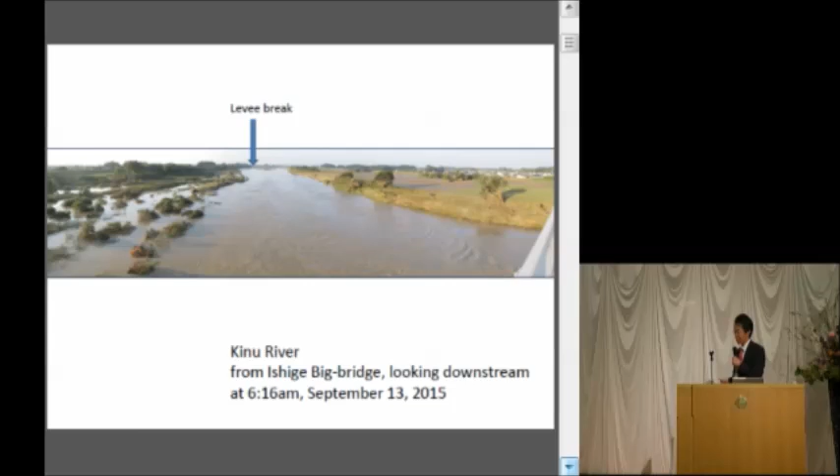This is from the Ishige Big Bridge looking downstream, taken 3 days after the levee break happened. The levee break point is over there. Exaggerated vertically, I superimposed the image of a cross-section.

Today's key phrase is channel capacity. If the channel capacity had been increased more, would that flooding have been protected or not? That's the question, and probably this kind of question will be, or already is being, raised.

Does a levee break by overtopping and the consequent flood disaster show the limitations of measures to reduce flooding probability by increasing flood flow capacity? Or does it still show the necessity to increase flood flow capacity to raise the safety level against flooding? Of course, it is very important to consider the longitudinal balance very cautiously, but there are two directions.

Before answering this question, I would like to first emphasize this characteristic, which is very natural: the flood probability is highly sensitive to changes in channel capacity.

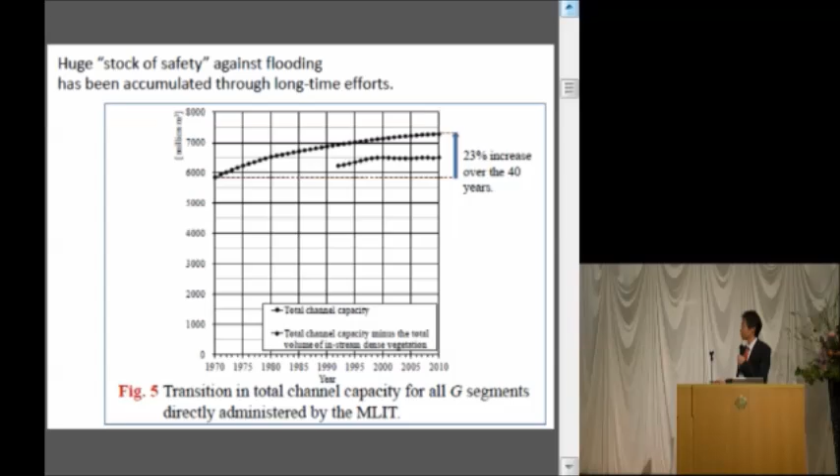Compare these two figures. For example, 23% is here, so this corresponds to double or even triple the return period. That's a great increase in the safety level.

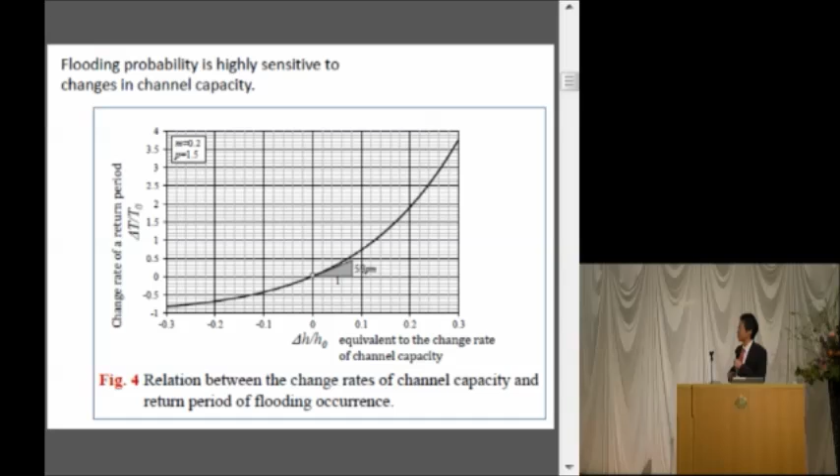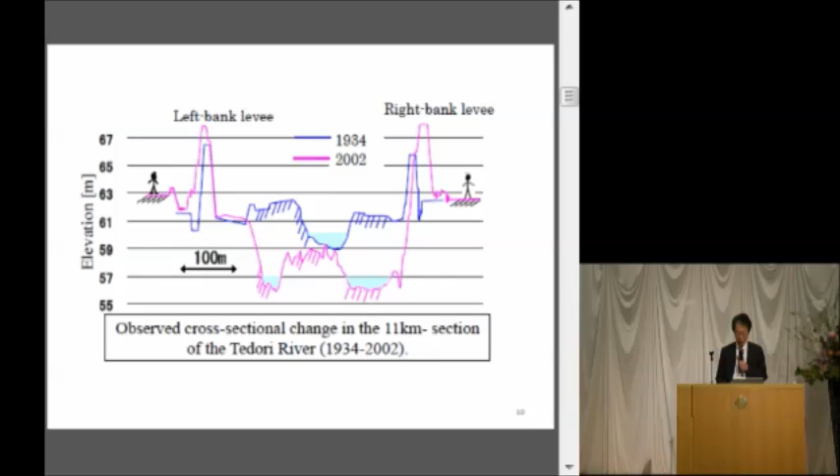So how about the answer to this question? A very natural answer: yes, now we are facing the impact of global climate change, and torrential rain frequency looks like it's increasing and becoming more violent. It is apparent, but at the same time, excavation is very effective in reducing flooding probability.

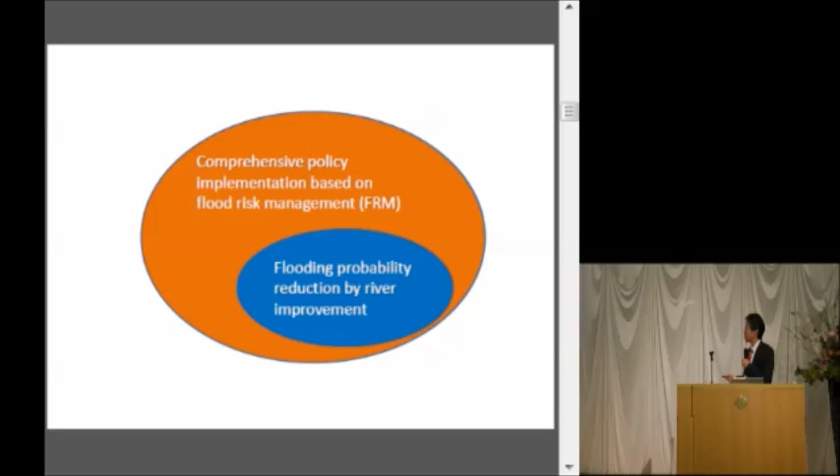So both are important, and today in my talk I would like to emphasize that this one is still important. Of course, this should be aligned among the various approaches belonging to flood risk management, but at the same time this was very important. The question is, how can we, particularly in Japan where we have a huge stock, maintain this huge built stock in terms of flood flow capacity?

How far can we rely on increasing flood flow capacity? Or in other words, how far shall we be able to rely on it? And how can we have a wise command of increasing flood flow capacity? These are the questions I would like to raise through this talk.

Prediction and control of post-improvement channel responses is still a core technology, even at the stage of comprehensive policy formation. This is the background of my talk.

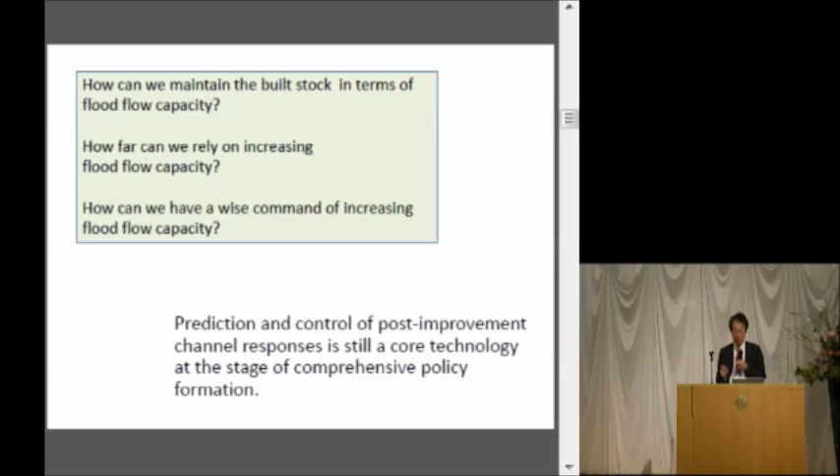Before entering the main subject, I would like to say that this paper focuses only on the local relation between channel capacity and flood conveyance, not extending the discussion boundary toward longitudinal balance in flooding probability in a river system, because that issue is very complicated, so it's beyond today's talk.

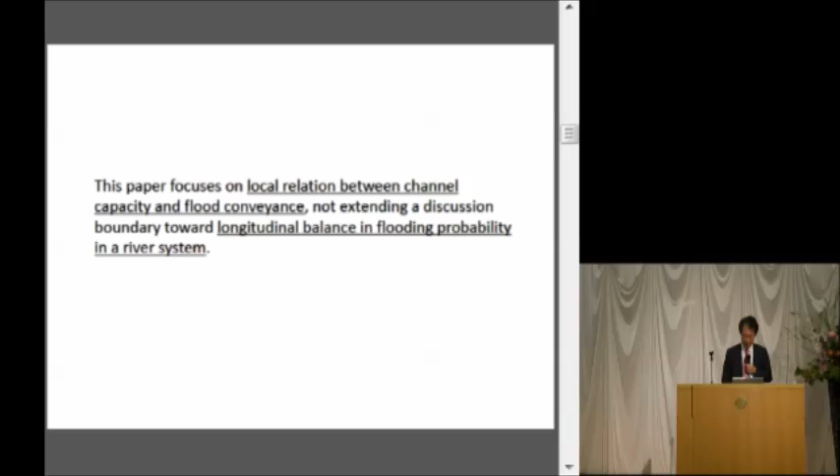Then, the reason for focusing on the role of sediment finer than gravel, while this GBR is mainly on gravel bed rivers.

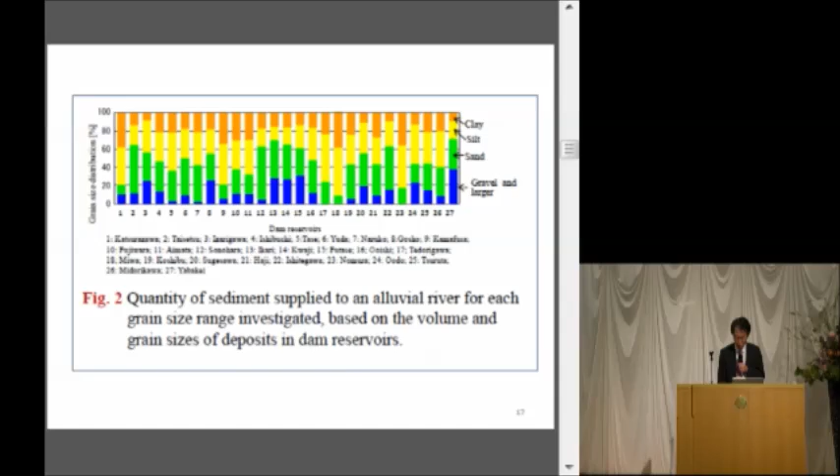Having these basic characteristics in mind, I made a very rough sediment budget estimate, assuming the sediment recorded in the dam deposit data all comes from the upstream of each river, and assuming that all that sediment is deposited within the most upstream segment, that is segment 1G.

This is a gravel bed river belonging to the alluvial fan zone, or segment 2G, also a gravel bed river but belonging to the natural levee zone. In either of the two segments, all the sediment is supplied and remains within these two segment zones.

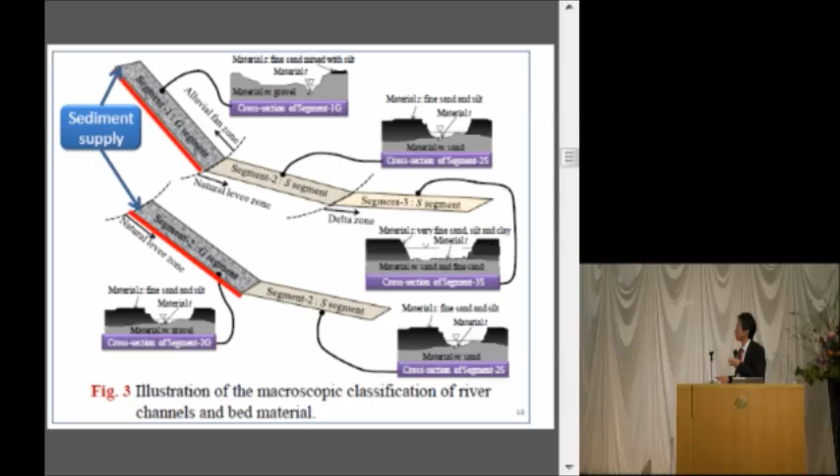This is the assumption, and the result is the estimation of potential impacts of sediment supply on total channel capacity. The upper one is on gravel and coarse sediment supply, showing the overall decrease rate of total channel capacity. The bottom one is the theoretically possible maximum rate of overall decrease in total catchment channel capacity due to sand and finer sediment.

First, the upper one is 0.1% per year. This is a very rough estimation, just for grasping the basic direction of discussion. So this value remains only as much as 0.1% per year; over 100 years that brings, say, 10% or so. 10% is big, but probably it can be handled in terms of average, long-term sediment management, unlike the situation the previous professor talked about.

But how about this? This is about sand and finer sediment supply. It reaches as much as more than 1% per year, so accumulated over 100 years that's more than 100%. So total capacity would be buried by this fine sediment. Of course, this is unrealistic, because actual rates are likely to be far below this level, since most sand and finer sediment usually pass through the G segments.

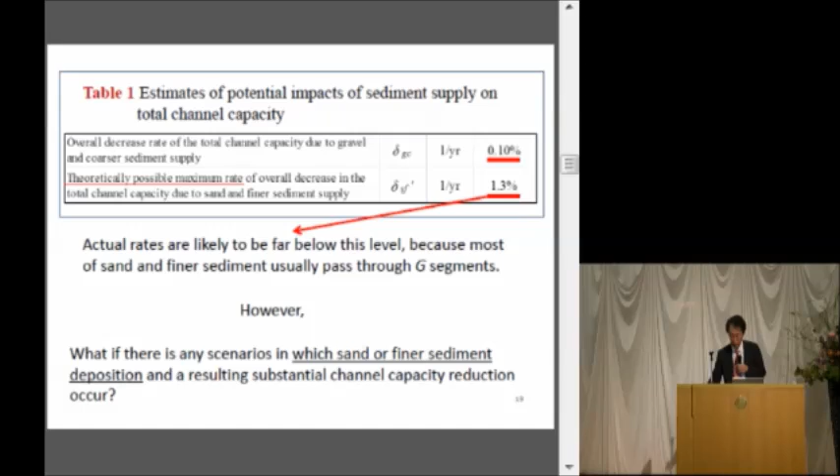However, this is my standpoint: what if there are scenarios in which such sand or finer sediment deposition and the resulting substantial channel capacity reduction occur? So we seek for this kind of scenario.

I would like to introduce two scenarios. Number one is expansion of dense vegetation areas in segment 1G, a gravel bed river in the alluvial fan zone, triggered by the formation of a top fine sediment layer - this is the keyword. The second scenario is floodplain accretion of fine sediment deposition and resulting channel narrowing in segment 2G, belonging to the natural levee zone.

As far as I know, these two scenarios deserve attention, particularly for river administrators. Scenario number 1 is for this segment, and scenario number 2 is for this segment.

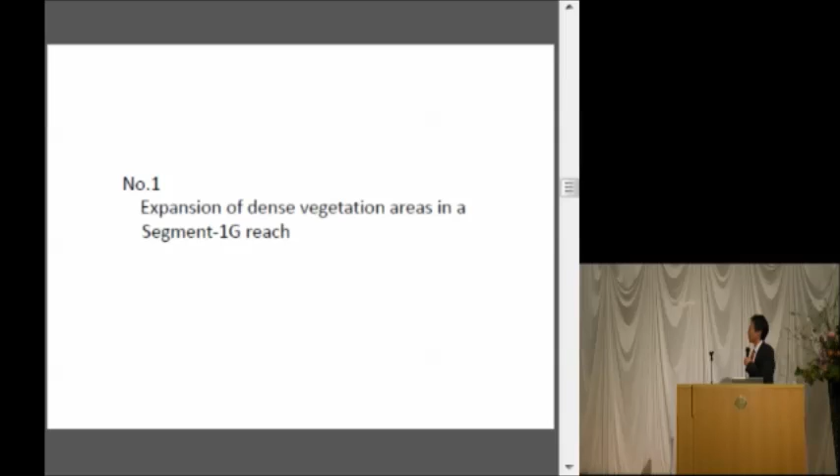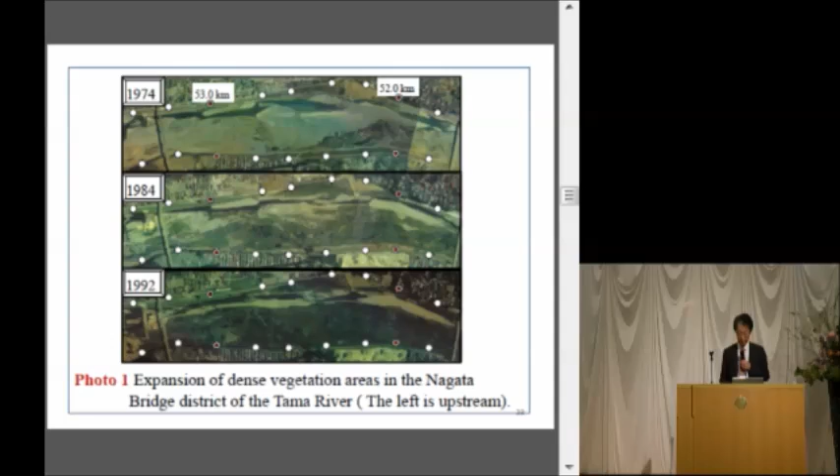First, scenario 1: expansion of dense vegetation areas in the segment 1G reach. This is the research area, in the Nagata Bridge district of the Tama River, where expansion of dense vegetation area had been observed since '74, '84, and '92. So less than 20 years was enough to completely change the river state like this. This photo shows the woodland expansion that occurred here.

But once the gravel is covered with this top fine sediment layer, the state factor for vegetation changes dramatically. After the formation of this layer, very dense vegetation rapidly intrudes. So in the whole process, the key point was the mechanism of why the top fine sediment layer was formed.

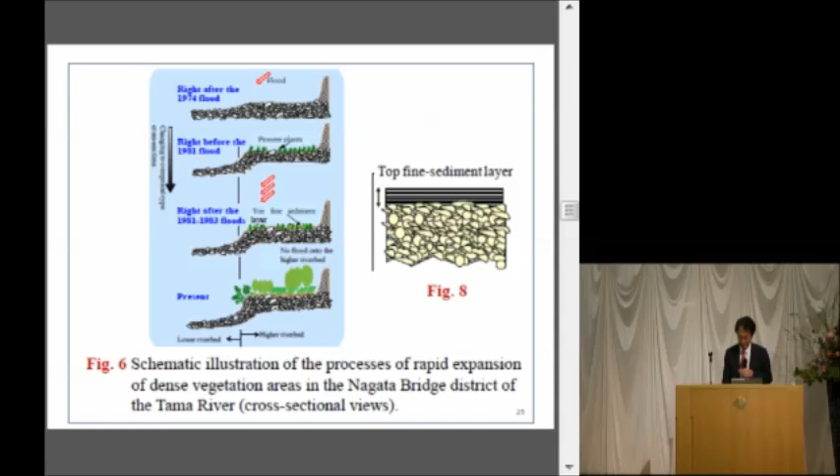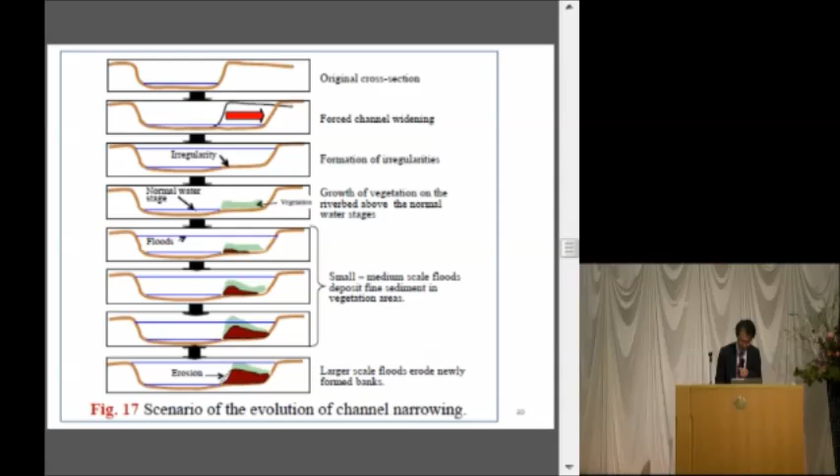So the last part of my talk, having those scenarios in mind: the question I would like to raise is, can we design channel modifications, channel improvement works, that are suitable for achieving immediate goals? I mean increasing the flow capacity, that is the immediate goal, of course.

Not only for that, but for minimizing the subsequent maintenance work and for restoring the ecosystem. All three of those should be satisfied simultaneously. Is it possible to make such an integrated channel design?

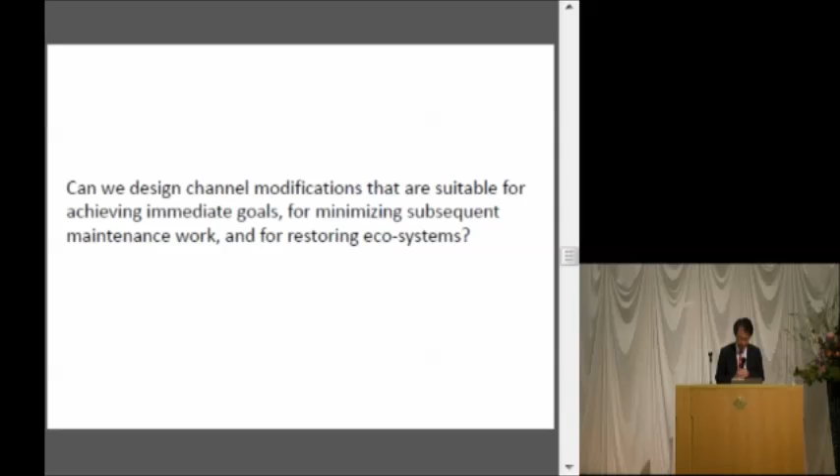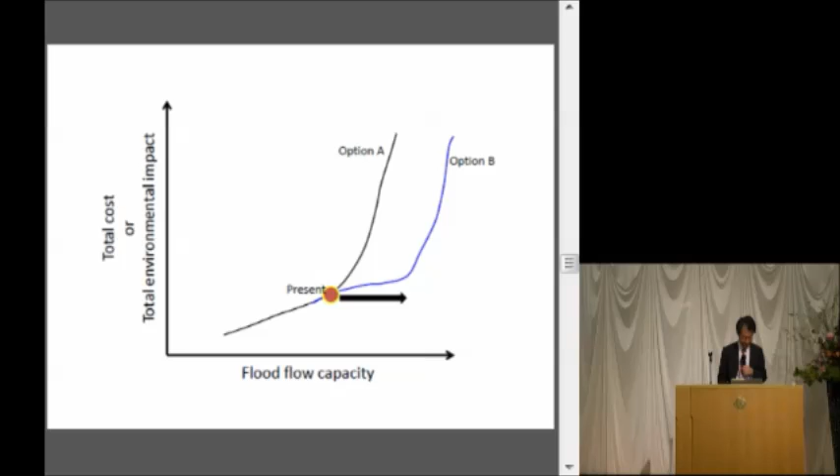I'm running out of time, so I would like to take one example, for scenario number one, the expansion of vegetation areas. To discuss this question, I would like to introduce the simulation frame to calculate surface state changes.

We developed a very rough prototype simulation model, where these kinds of essential systems can be reproduced. This is composed of 4 parts. Part 1 is the original bare gravel bed.

Part 2 is the intrusion of pioneer plant communities. Part 3 is top fine sediment layer formation. And part 4 is accompanied by the growth of stable vegetation.

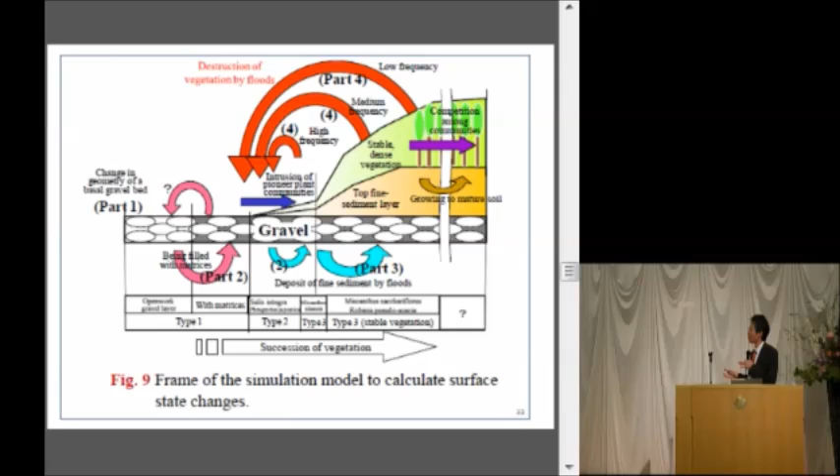This is a very simple explanation of what the simulation is like. This is the target riverbed, and we add the discharges, annual discharges like that. We can set them arbitrarily. According to the discharge and the fundamental dimension of the river channel, using this system with some parameters, we can calculate the state riverbed surface state change.

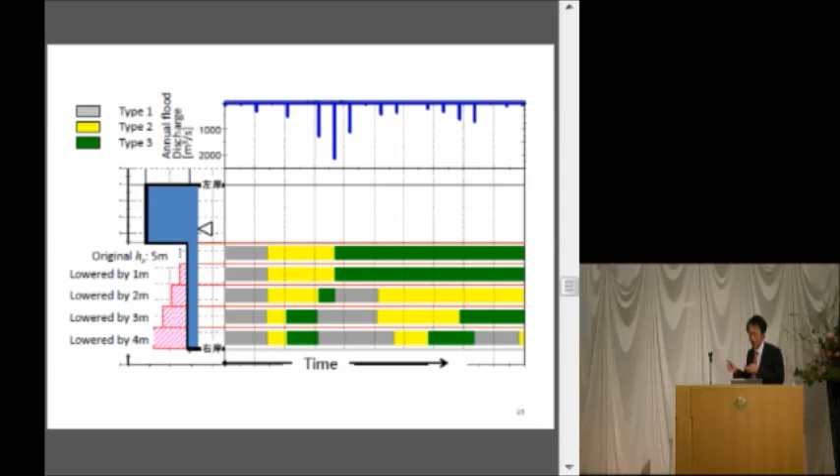For example, bare, type 2 sparse vegetation, and dense vegetation. If we lower the riverbed height by 1 meter, 2 meters, 3 meters, the result is here. For example, we lowered it very much, and then the higher riverbed can more easily be affected by the discharge. Then this kind of alteration becomes very active. That's the key point of the simulation.

This is a kind of engineering tool for engineering judgment, named the diagram for characterizing riverbed with respect to stable vegetation prevalence. This axis is surface state alternation cycle, and this is stable vegetation duration ratio.

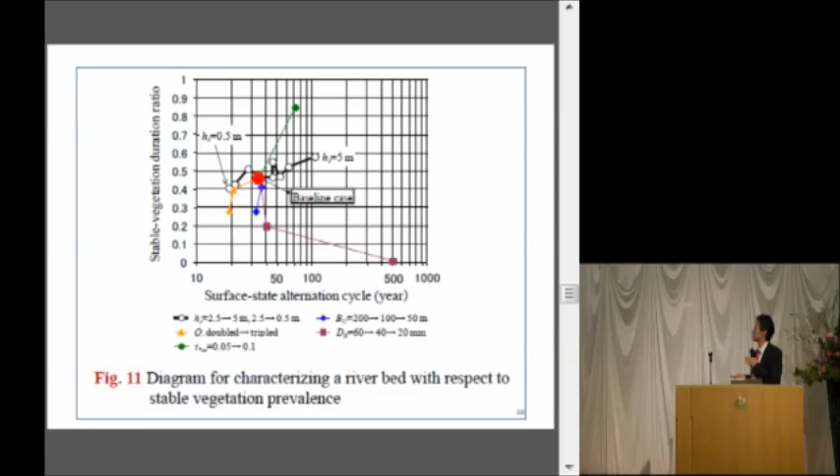So for example, if you change the HS, the height of the higher riverbed, like this and like this, the alternation cycle accordingly changes like this and like this. Extracting this part only, this is the figure showing the relation between HS, height of the riverbed, and the surface state alternation cycle.

So with the HS of 2.5 meters, it's a kind of medium state. But if the HS is increased to 4 meters or even 5 meters, the state is no longer aquatic, but getting completely terrestrial. But if you can lower the HS riverbed height here, the surface state is toward more aquatic.

So by lowering the HS, you can probably increase the flood flow capacity. At the same time, you can revive the active alternation between vegetation and riverbed. That is very good for environmental protection because in this side, vegetation indigenous to this gravel bed has been endangered, so such restoration of the alternation cycle is very good for protecting endangered vegetation species.

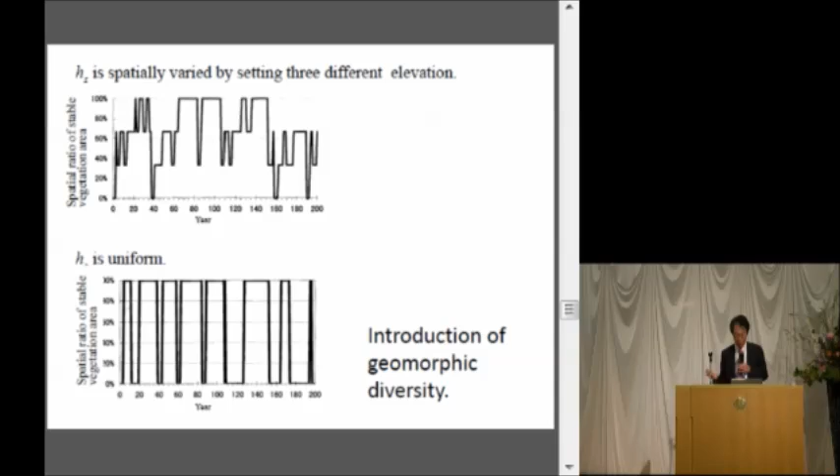This is also a good aspect for vegetation indigenous to the bare gravel bed. So let me skip ahead, I'm running out of time, but we did conduct the same kind of examination for scenario number 2.

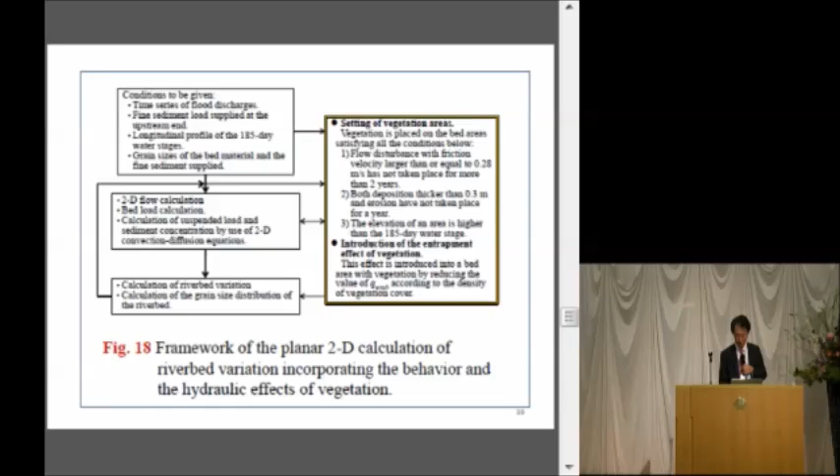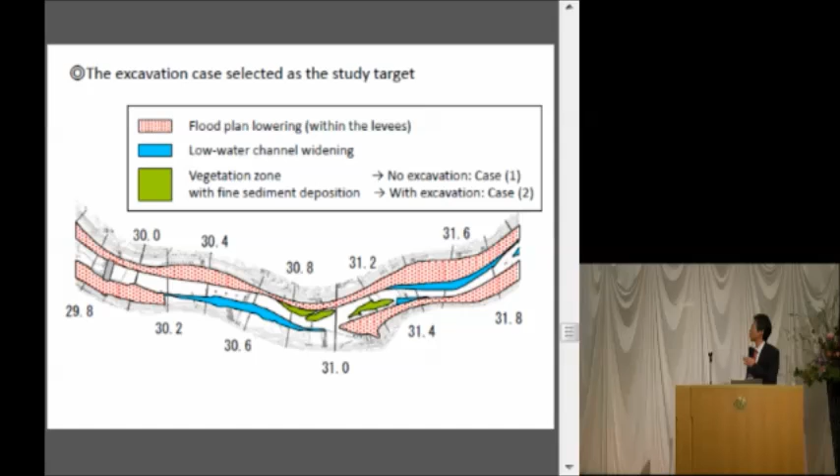There are 2 cases, for example, we set 2 excavation plans. Plan number 1 is no excavation for the Middle Island. Case number 2 is the excavation will be done even for the Middle Islands. What's the difference between the 2 excavation cases? That's the target that we examined.

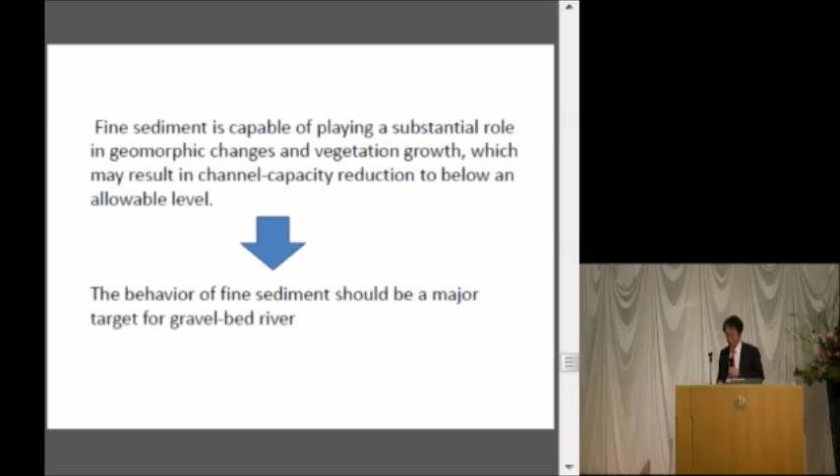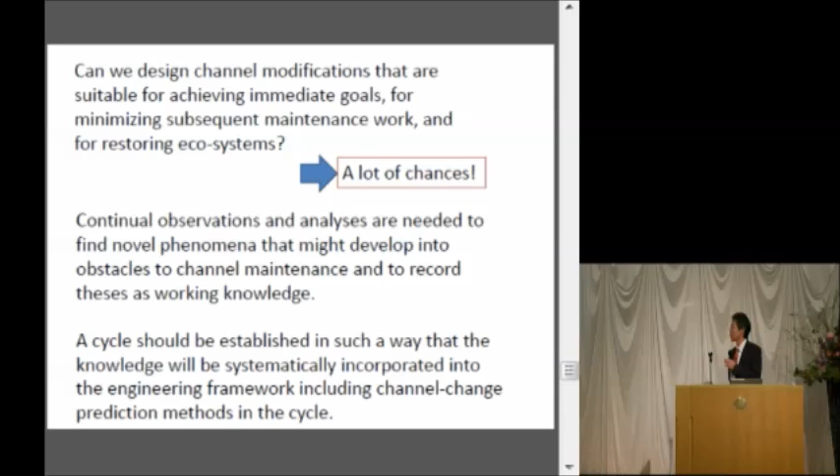Finally, I'd like to emphasize that scientific research should pour into the management side or engineering side, and interaction should become more active. I think that we will have more chances to make good designs in integrated perspectives. Thank you for your attention. That's my talk.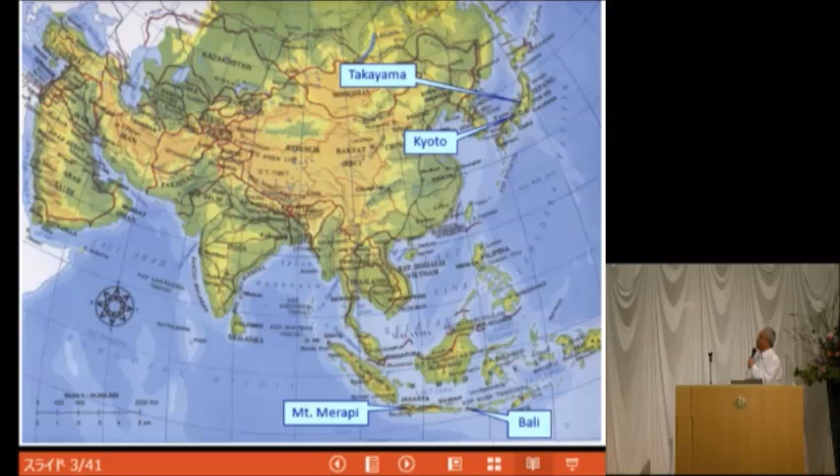This is the location of Mount Merapi. I'm sorry if you don't know about Indonesia, but I'm quite sure you know Bali very well. From the west to the east, it's about from London to Moscow, maybe too big. We are here in Takayama, and a few days ago we were in Kyoto.

This is the biggest disaster since 2004. As you have heard, starting in 2004, this was the tsunami in Aceh, earthquake in North Sumatra. Casualties were reported to be 125,000. This was a very huge disaster at that time, affecting neighboring countries like the west coast of Malaysia, Thailand, and even the west coast of India.

If you just look at Merapi itself, this is only a small part of so many disaster types in Indonesia. We have earthquakes, landslides, flash floods. Even this one actually is not a natural disaster - some people mention this as a human interference disaster.

Then many earthquakes in Padang, West Sumatra, and most likely in Java. And just recently, some other mountain in East Java, the Raung eruption. So here is Mount Merapi - the last eruption was in October 2010.

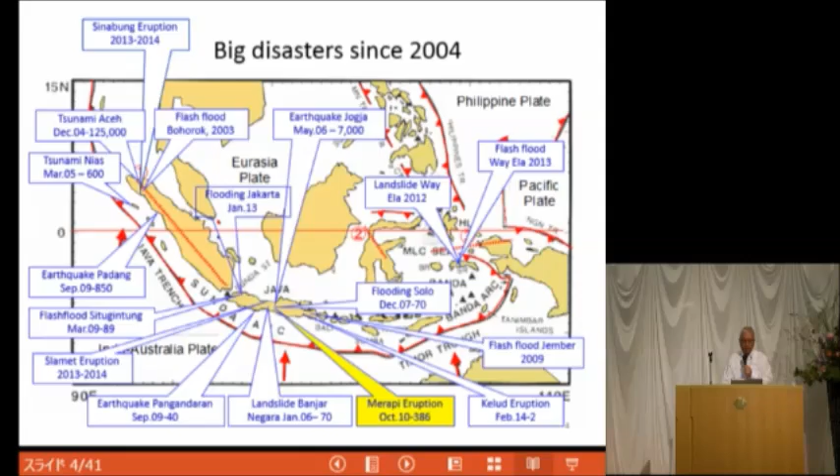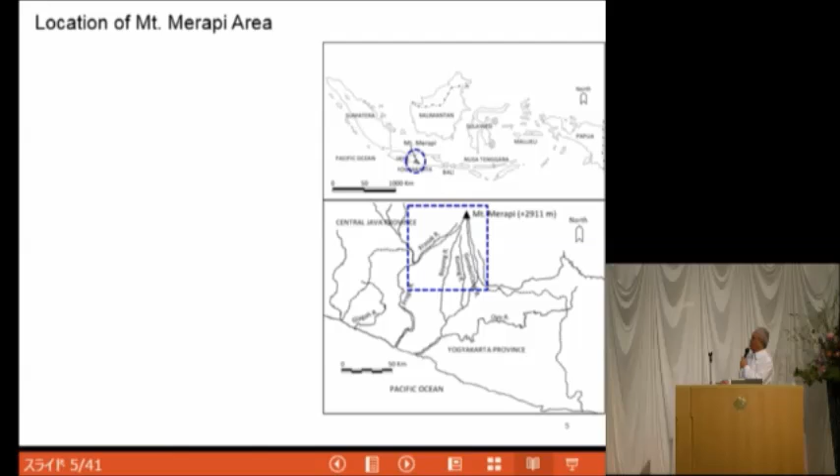Again, the location of Mount Merapi - this is Indonesia, this is Central Java, just showing you the geography, and this is the affected area of Mount Merapi. You may see the scale here, this is around 50 kilometers. So this belongs to two provinces - the Yogyakarta province as well as the Central Java province.

The river system is like this - the rivers at Mount Merapi slopes drain to the west-south side, crossing the very strategic national route, then to the south to the city of Yogyakarta, where also lies the runway of the international airport when you visit Yogyakarta. Another one is the international cultural heritage temple. So it's very strategic property.

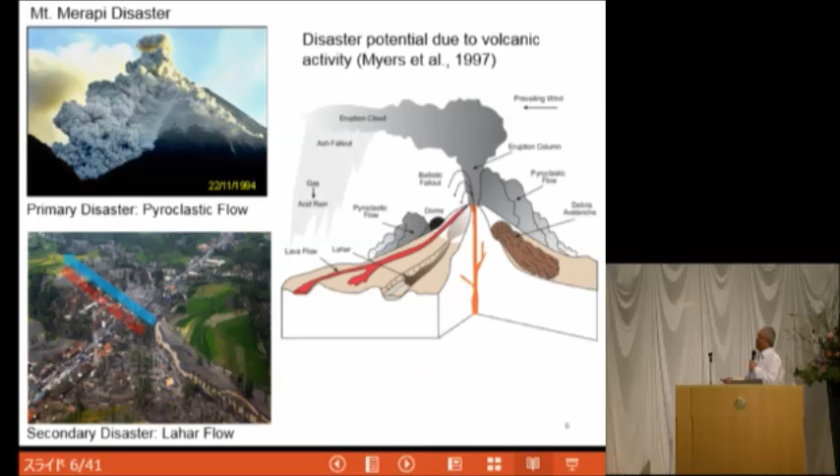So this is the primary and secondary disaster. Amazingly, you see, for 100 years this area has been free from the lava disaster, simply because of the geographical condition - there is another mountain in some place here.

Most of the lava flow was directed to the west side, west-southwest side, a bit to the north, but mostly west, southwest, and a little to the south. So I would say we are lucky, because in the city there are so many important properties.

And the last eruption was this one. This was the longest travel distance of the lava flow, or hot lahar flow, reaching a radius of around 16 kilometers. At that time people were supposed to evacuate at a radius of more than 20 kilometers, so it was a very chaotic condition. This area is 23 kilometers, and I stay here at 23 kilometers also, so at that time the situation was very depressing.

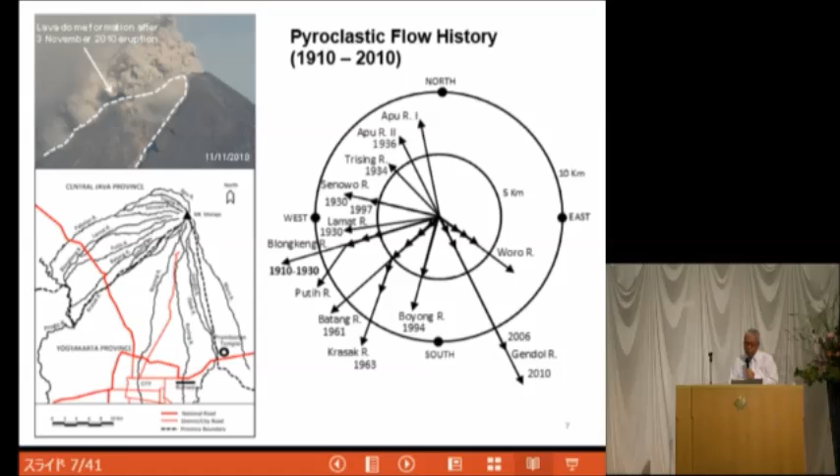This is the condition in the 2010 eruption. As I told you, the hot lava mostly occurred in the Gendol River, reaching up to 16 kilometers, just 5 kilometers before the temple.

We were also lucky that the runway was not affected, in terms of the lahar flow threat the runway was safe enough. But due to the ash, the airport was closed for about 1 week, or 8 days actually. At that time I remember some Japanese colleagues we were meeting with in Yogyakarta, and some participants were threatened that they couldn't return from Yogyakarta, so they had to go by bus.

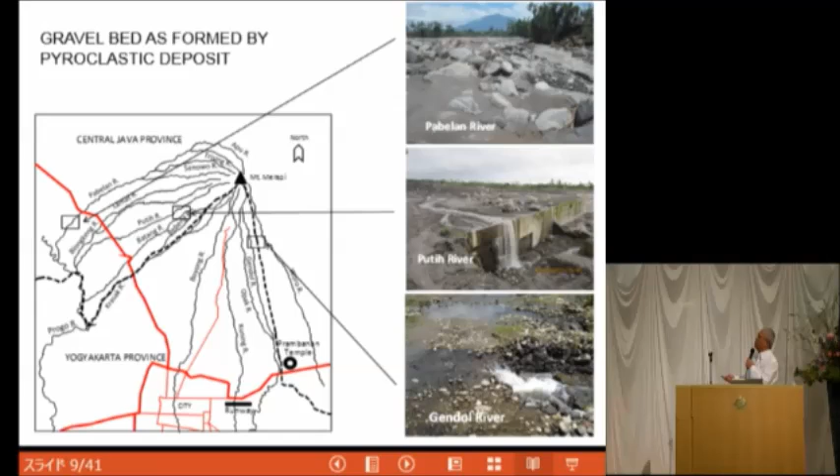And this is the city situation of Yogyakarta. Looking at the river, let me show you this river just several weeks after the eruption. The check dam is just filled up by this kind of sediment formation, riverbed formation like this. So it varies a lot from one river to another.

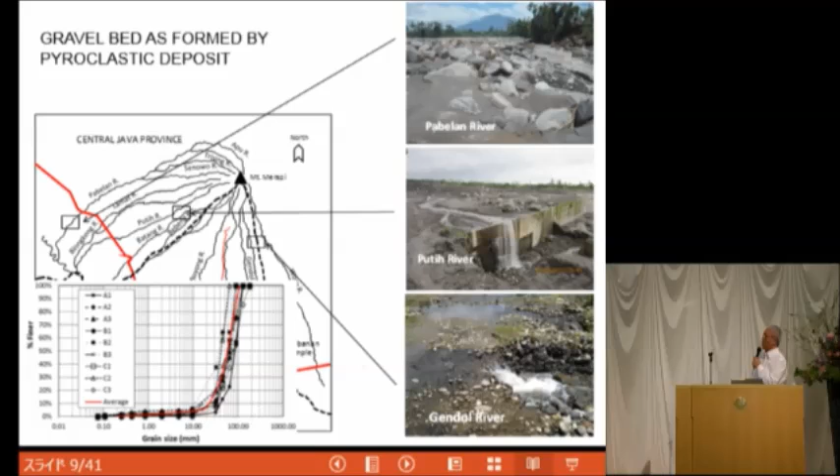If I try to show you how to identify the size distribution of the sediment, it's rather difficult, but my colleague Dr. Adam tried to identify the characteristics of the sediment, taking into account sizes larger than 10 centimeters, or 100 millimeters. He introduced a technique something like this. So when we have to do sampling in the field, it's very difficult to decide which location to focus on, because it's so variable.

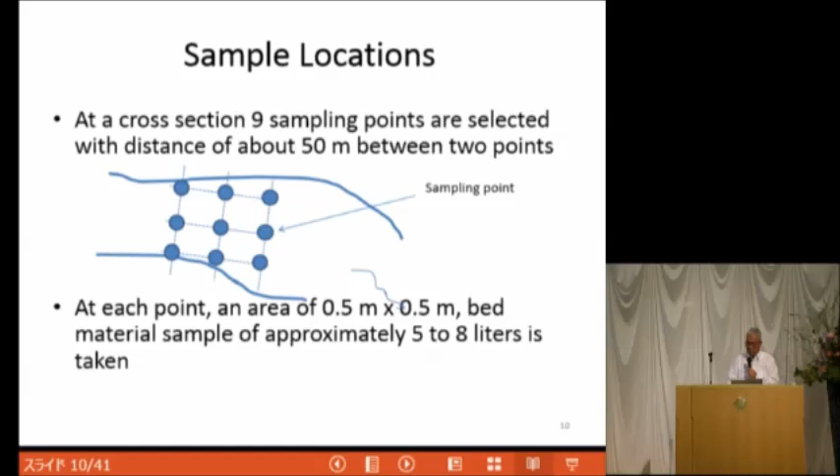So we decided to sample at a distance of 50 meters, and at each point we spread out half by half a meter, and take 5 to 8 liters of material, regardless of size, all sizes. The sample is taken using a spade and a plastic bucket. You can imagine that we cannot take stones bigger than the spade size.

Then the material is poured out and we split it by size. The smaller grains, as usual, we analyze using sieves for distribution, and for the bigger ones we use this other method. It's a combination of size and volume and weight, so of course we have to convert the volume into weight. This is the equipment, I'll just skip it, that's the method.

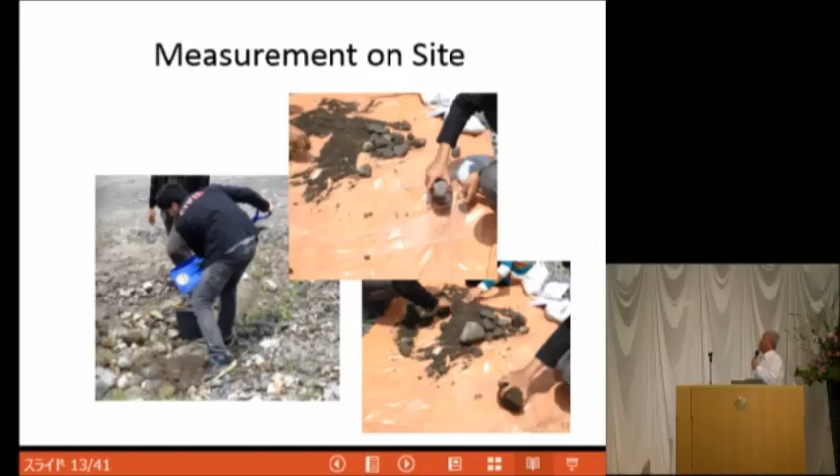Now I'd like to show you the impact of the damage due to the lahar flow in the several months after the eruption. As you see here, this took place in less than 2 hours. The pier of the bridge became like this, and some sabo structures were damaged, and the mechanism for most of the sabo damage is just like this.

As you see, the structure here is a concrete gravity structure, so its stability depends just on the weight of the structure itself, which lies not on bedrock but on deposit. Once the high concentrated flow goes over the check dam, it gradually experiences local scouring. When this becomes hanging or unstable, the structure gets damaged for the first time.

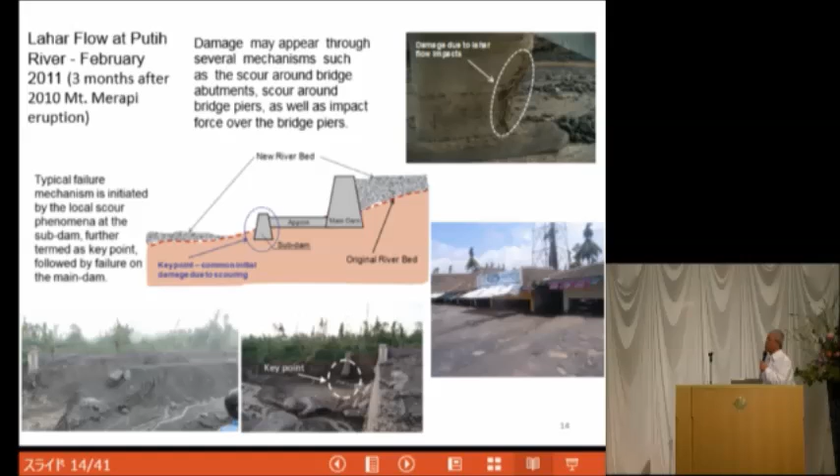And this is the condition, so this is the key actually. Once this is broken, it's followed by the main dam and so on, so finally all the sediment moves away downstream to fill up the area downstream.

And this once again is the primary and secondary disaster. You see even the primary one happened in 2010 - this kind of filling up also happens in less than 2 hours. Initially it was just like a beautiful view here, but now it's buried by another 2 meters of sediment.

So I want to talk about the limitation. Again, if we try to think about the level of risk countermeasures, it's rather difficult. I just want to let you know the way the government controls the countermeasures for the Mount Merapi disaster.

We follow both structural and non-structural approaches. The structural, as you may see, is the government-built physical construction, but non-structural, we built another one. In some cases, we also touch the community, educating people to be aware of the kind of disaster. But this is based on past disaster records, and capacity may also be limited. So we have to remember that this kind of disaster always has such constraints and limits. This is one thing we have to consider.

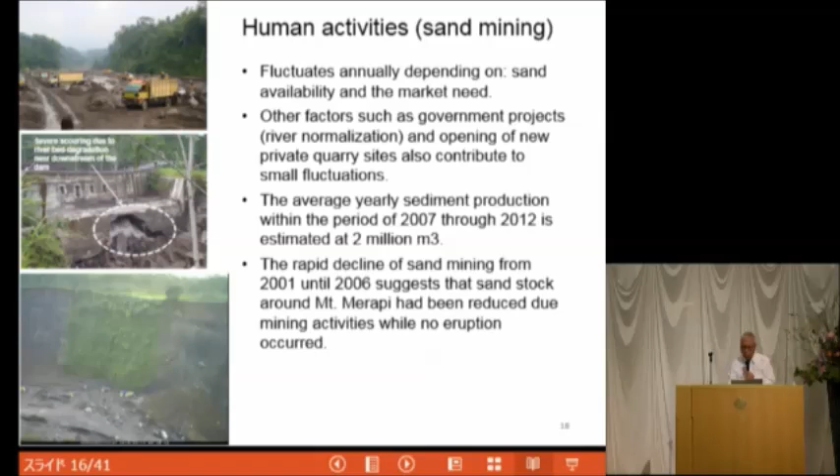And this is another example of the activity. We try to let the sand miners know regarding the potential risk. So it may be like this - even without lahar flow, this structure is also potential to collapse. And this is the integrated sand mining management. The government considers that the involvement of the community is very important, so communities should take part in sand mining management by doing such kinds of activities. This is in the village near the sand mining location.

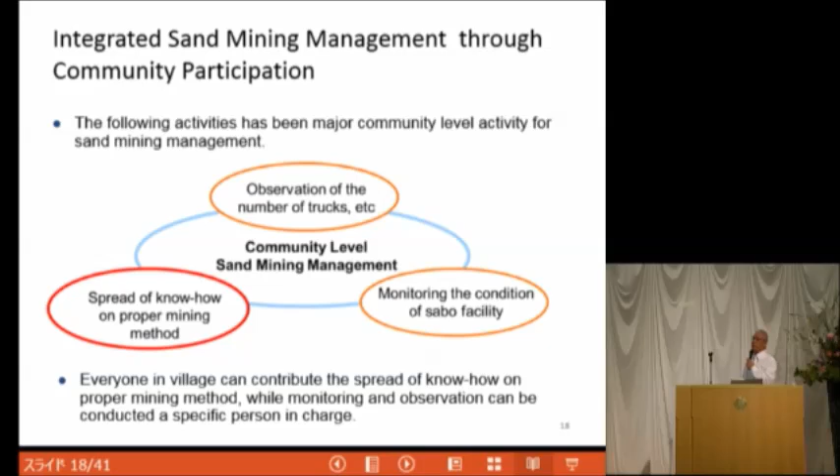Let me show you examples of the damage from primary and secondary disasters. This is the primary one. This is both primary and secondary, due to the Mount Merapi eruption. This is the lahar flow, and this is both hazards. So both are actually very potential to cause such kind of loss.

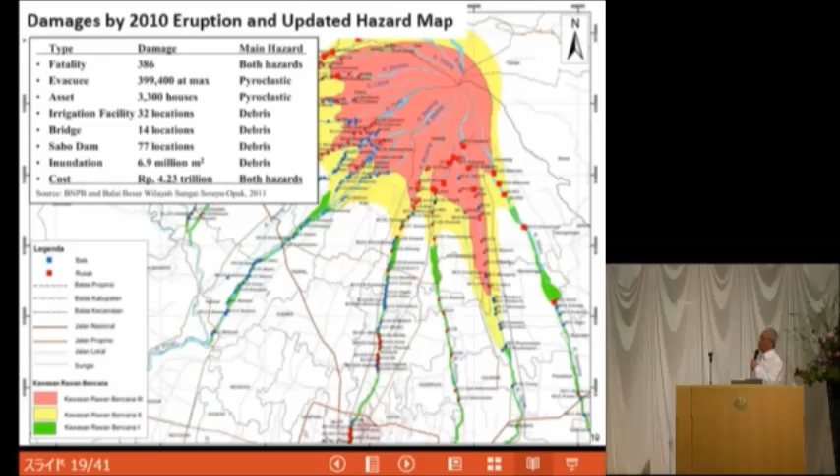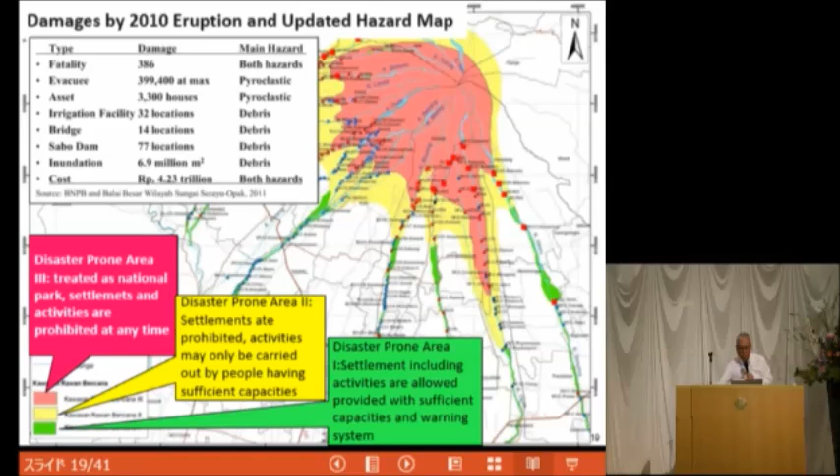And this is the way the government gave such a hazard map, that in the red zone, practically people are not allowed to stay here. And there is the classification. But the lahar flow maybe in this area is not quite so dangerous. That's why some activities or settlements are allowed, provided with sufficient capacity of warning system. Once again, this is the alert of Mount Merapi.

And how about the lahar? Actually, it's not available. So this is the last part, the question I'm going to ask you to further study on this kind of system. But firstly, we have to think about why it is important, and then how is the criteria - is it going to be like this? And the more important thing is the threshold.

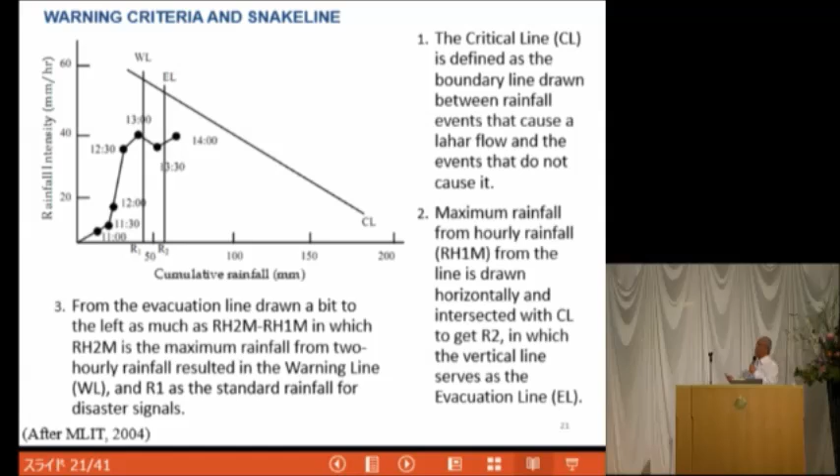But MLIT suggests something like that. In our case, to apply such a method, we have to get a very nice historical data record, which is supposed to be, in the suggestion issued by MLIT, at least 10-minute rainfall information. This, in our case, is rather difficult.

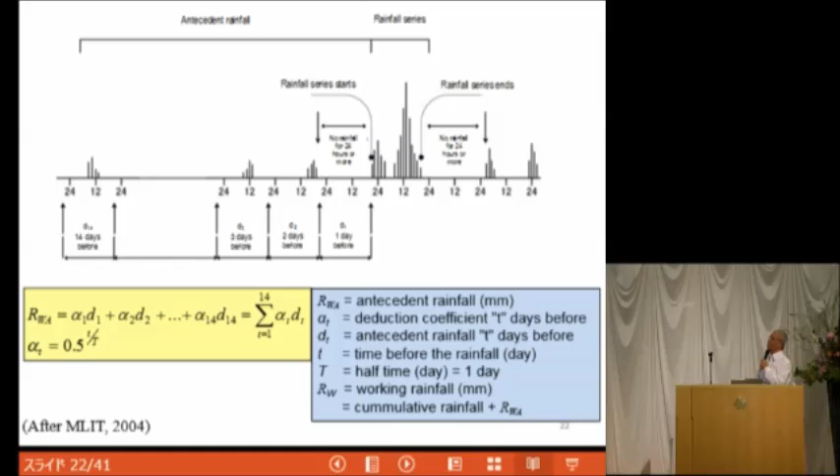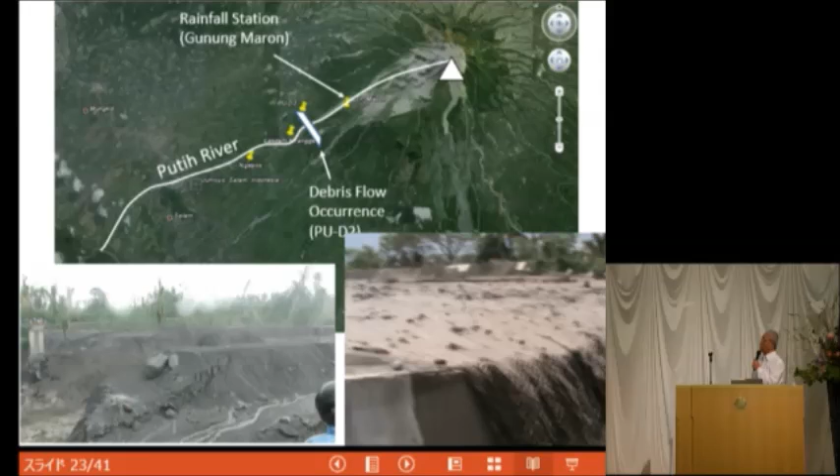This is after the 2010 eruption, then the first time of the rainy season. And then this is another information of what we call lahar flow, mixture of water and also boulders with the size up to more than 20 centimeters.

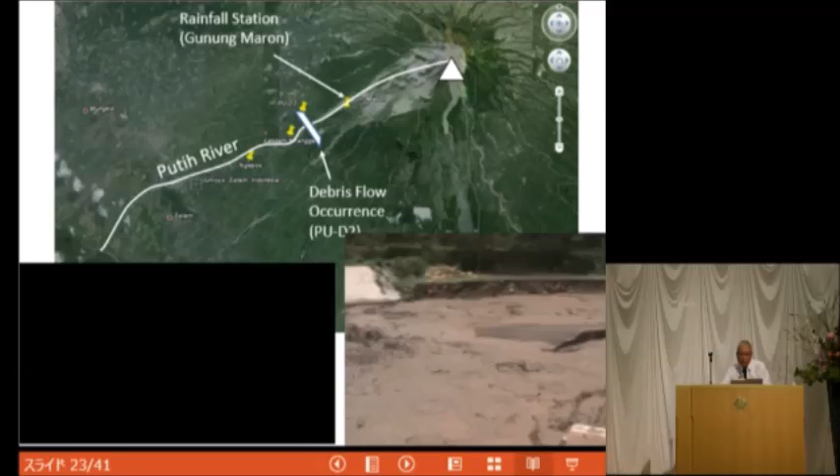So let's try to look at the rainfall situation. I consider the 1 hour rainfall, of course this depends on the availability of the data. So finally my student also tried to show the most affected area experience from the heavy 1 hour rainfall condition, the short duration rainfall condition. So this is towards the southwest, and this is towards the south.

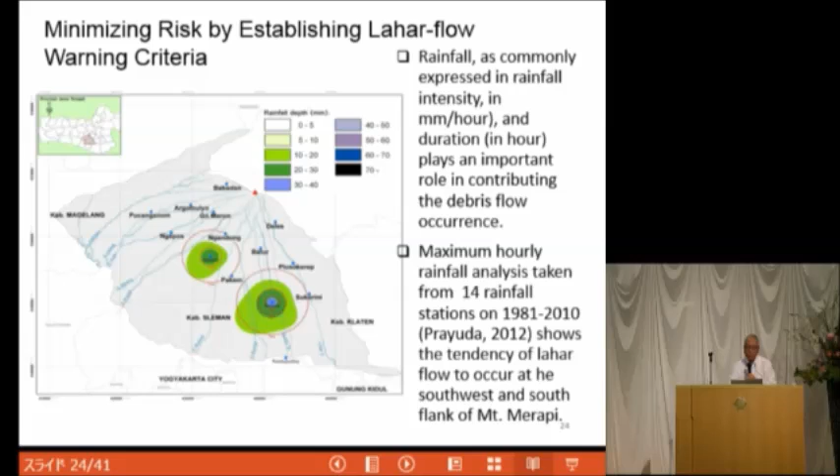And this is just only the data on 1976 that I can collect. Gunung Maron was actually a very ideal and very good location in terms of doing such kind of experimental field experiment. But due to the 2010 eruption, and due to the 2006 eruption, and maybe in 1994, it was always burned down by the lava flow.

And as you may see here, this is the result from 1976 data. So here we have the critical line, and then this is the warning line and the evacuation line. So the red spots here, this is the rainfall condition which contributes to the lahar flow in PU-D2, but the blue spots here is the rainfall characteristic which does not cause the lahar flow.

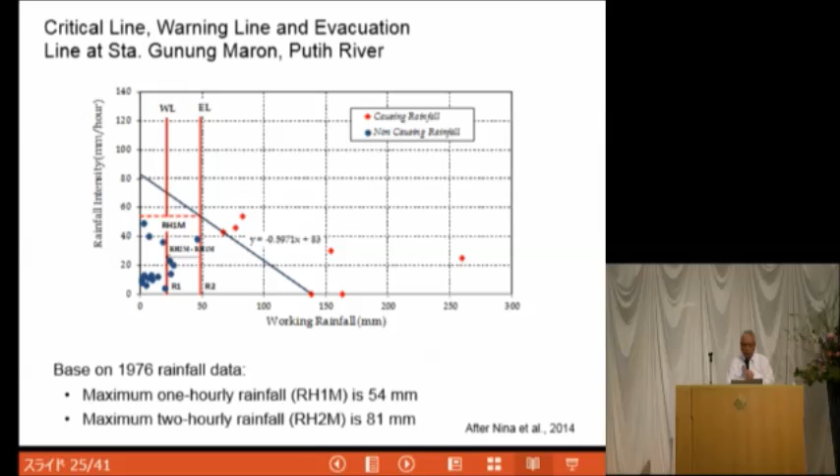Actually this is also 1 hour, but I think it's not enough if we get only 1 hour data every 1 hour. So this is 15 o'clock, 16 o'clock, this is 14 o'clock. So what we need actually is shorter information so that we will know the trend of the line. So this is the snake line of the occurrence rainfall.

Something like that, okay, this is the final condition, until every 1 hour. If we compare with the other rainfall condition, this is the non-causing rainfall. So you can imagine, so what do you do after this one? You ask the people to evacuate, but after that, this never crosses the critical line.

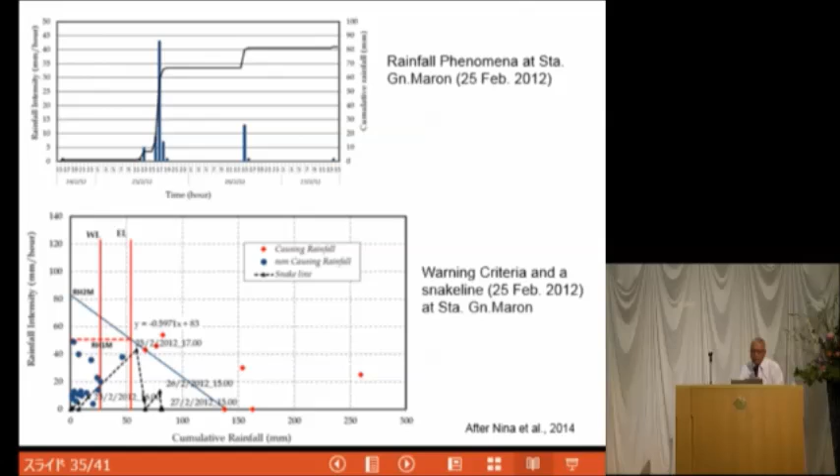Variability, like this morning's presentation, the threshold variability is very uncertain. In some way it's very inconsistent, due to such kind of condition, the weathering, the compaction, and some human activities. So the easiness of the deposit to be eroded is also variable from time to time.

And then there's variability due to the prone characteristics of the river itself, because each river has its own characteristic of the sub-basin, probably, and also some deposit characteristics, and so on. That's why I try to neglect this. So please be reminded that this kind of data is not quite consistent. So we don't really know what kind of factor that is.

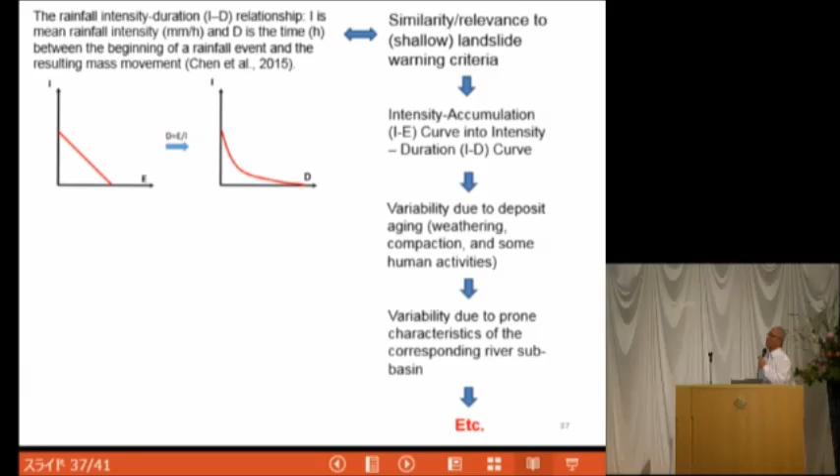And okay, this is the question: why is it important? I think this is very important because we are serving mankind. The problem that we actually face is just what is the level of alert and what is the threshold. So I think this needs further study.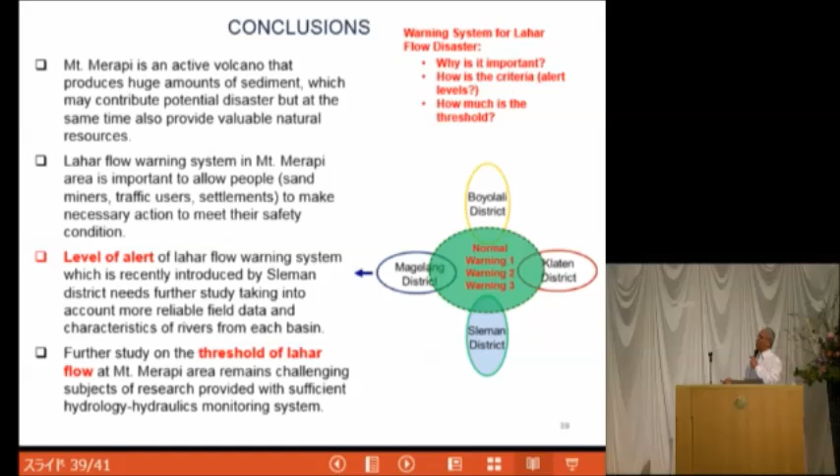But just the rainfall - of course, well, we are researchers actually, we expect disasters. But common people, they don't expect it the other way around. So always we are very ambitious to get the data, but actually we are inviting the danger condition. Thank you very much.

What we've discovered, I think, is some hard evidence of the significance of upland sediment sources and transfer links to downstream flood risk management. Often we talk about that, but it's not always common to have the hard data to show these links are real. Work by Alex Henshaw showed that intensification of farming in mid-Wales increased coarse sediment yields by 12 times and fine sediment yields by 5 times. This was despite relatively modest impacts on the hydrology. So we often think of changing land use to reduce water runoff, and that's a fairly modest gain, but changing land use can bring massive reductions in sediment yields.

That's really important because work led by Stuart Lane at Durham and undertaken mostly by his PhD student Emma Raven showed that about a year and a half of aggradation produced by those elevated sediment yields in a flood control channel can increase the flooded area by as much as half a century of hydrological impact of climate change. So in terms of sensitivity, the systems are more sensitive to changes in sediment yield than they are to changes in climate change, and I think sometimes that's not fully realized.

And that turns out to be really important because Professor Coulthard's work on the Carlisle flood of 2005 showed that aggradation of the flood control channels and streams within the urban area contributed very largely to an increase in both the inundated area and the depth of inundation and the flood damages, because this isn't clean water that comes into your house. It's silt-laden or it has debris with it, which increases the costs and makes recovery more difficult.

And of course, it's not just sediment. Work by Dr. Nick Wallerstein in Belfast showed a very strong correlation between the risk of blockage of culverts and other engineering infrastructure and the yields of debris, both natural and anthropogenic, as you can see in the left and right-hand pictures. My particular take on this is this isn't the debris' fault. The culverts are badly designed and undersized. If a bridge can't pass large wood, it's a bad bridge, and the wood has a perfect right to be in that channel. We should redesign the bridge.

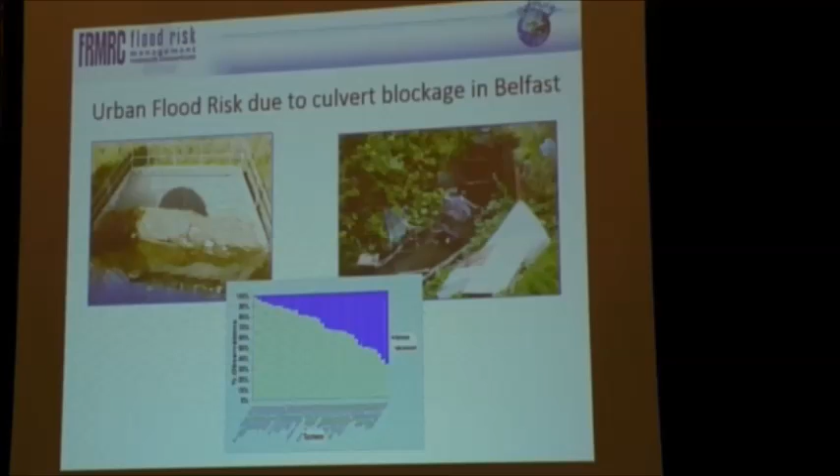In a flood foresight project that I helped lead in 2008 that was repeated recently, we showed that there's a major risk here for the future of a clash of cultures between flood risk management and environmental protection. Under a global sustainability future, we predicted that by the 2050s, the train wreck, the head-on clash between trying to meet goals for flood defense and trying to meet goals for biodiversity or ecological quality, could triple flood risk and could quadruple it by 2080. We have to align our policies because we have multiple functions, but we only have one river. We have to share it, we have to optimize it.

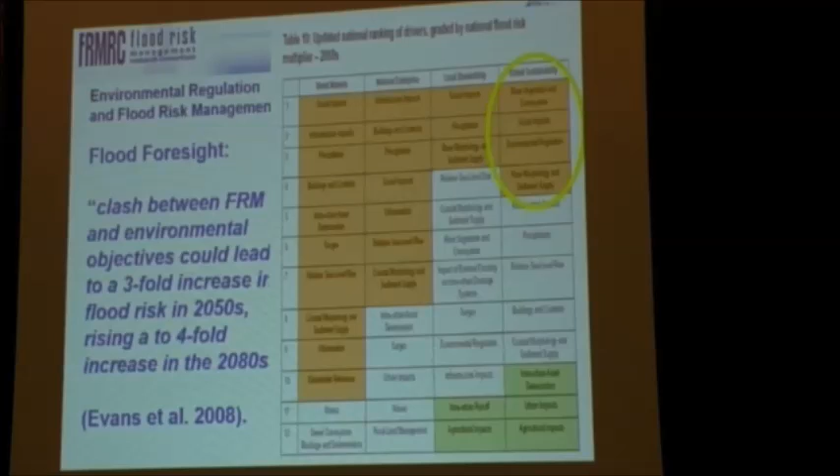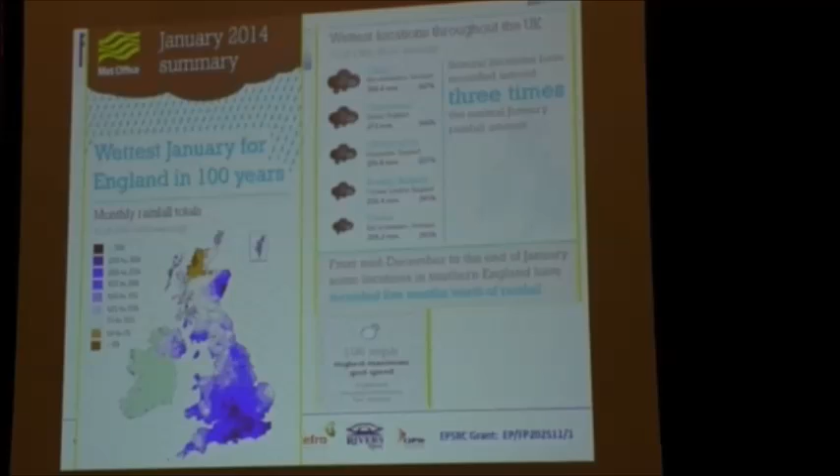So why is this important? Well, it's important because of what happened in 2013-14. We'd been predicting for some time that flood risks would get worse in Britain if we went on under business as usual, and that prediction was horribly and tragically proven in 2013-14. Because we had, just like last week, unprecedented rainfall, but not locally, over the whole of the southeast of the UK. The result was the wettest January ever since records began, and catastrophic flooding all over the country.

Because this was coupled not only with heavy rainfall, but also with very high winds and storm surges, so combinations of flooding that were extremely damaging and extremely unusual, because we had coastal erosion and coastal flooding, river flooding, pluvial flooding, and something we haven't had for a long time in Britain: groundwater flooding. And this is really, really scary. This coincidence of flooding means that the individual predictions for each type of flood must actually be compounded, because we have a new risk, which is the risk of coincidence and combinations of sequences and clusters of floods. Very, very worrying.

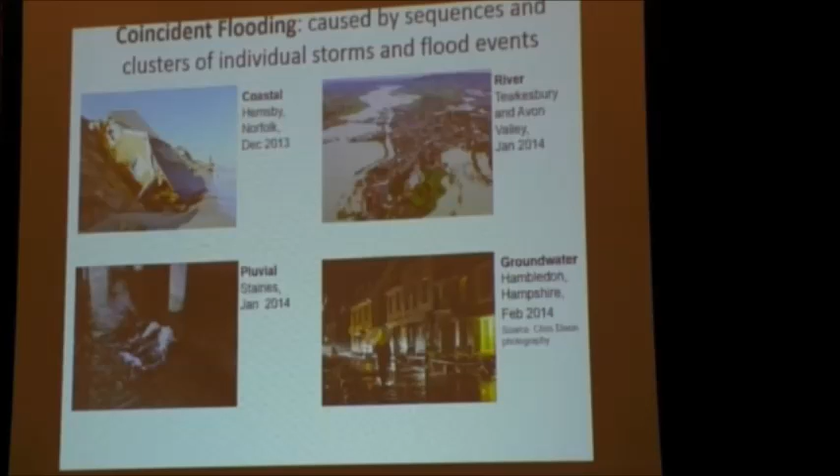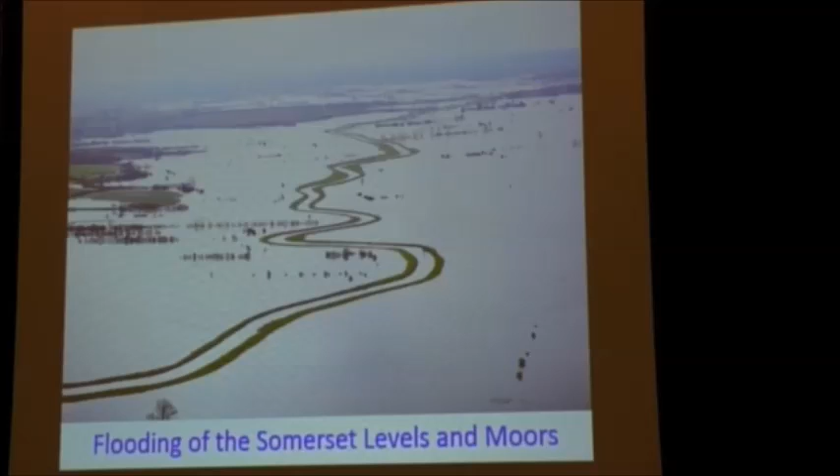The reaction of the people was very, very predictable: stop the flooding, dredge the rivers. And that's exactly what happened because of the massive political imperative to do something immediately.

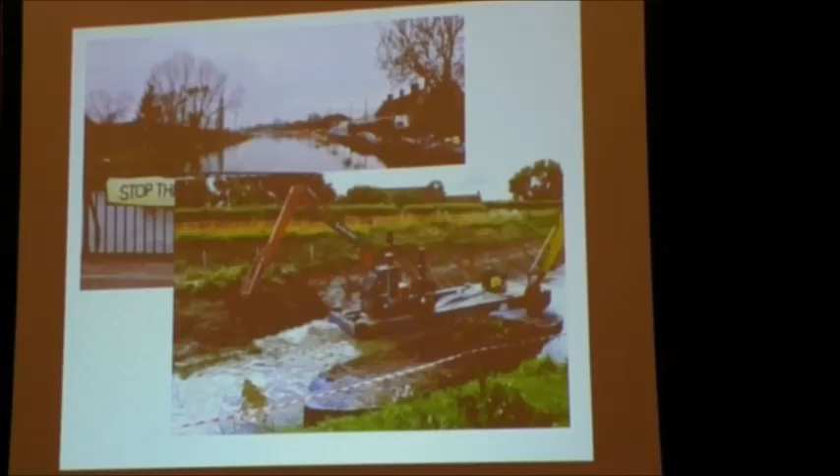The response to that has been to destabilize the riverbanks, desilt the rivers, and decimate the eel population, an endangered species. So this is what happens if you don't align your ecological management and your flood risk management. You get into real difficulties.

And more than that, what flood risk management showed—even if we don't like eels or think wood belongs in rivers—there's a much better reason for doing what you said, which is to bring the ecology, the sediment management, and the flood risk management together.

We predicted through flood foresight that to keep flood risk levels in the UK at 2000 levels through to 2080 would cost £52 billion if you did it with engineering alone. That's actually not bad—post-2008 financial crash, 52 billion is still a lot of money.

But, and this is why the Treasury loves our study, if you use an integrated system of measures—structural, non-structural, improved warnings and improved preparedness—you can achieve the same goal for half the money. So this isn't about loving the environment or being a tree hugger. It's about getting value for money for the people who pay for this stuff.

My closing question then, and you already started to answer it a little bit in your closing remarks: is there potential for working with natural processes in Japan? And where are you on that break curve? I suspect you're at the steep bit, and that continuing to just enlarge the channels as you have done for 40 years may not be suitable for the future, but I'd like your opinion.

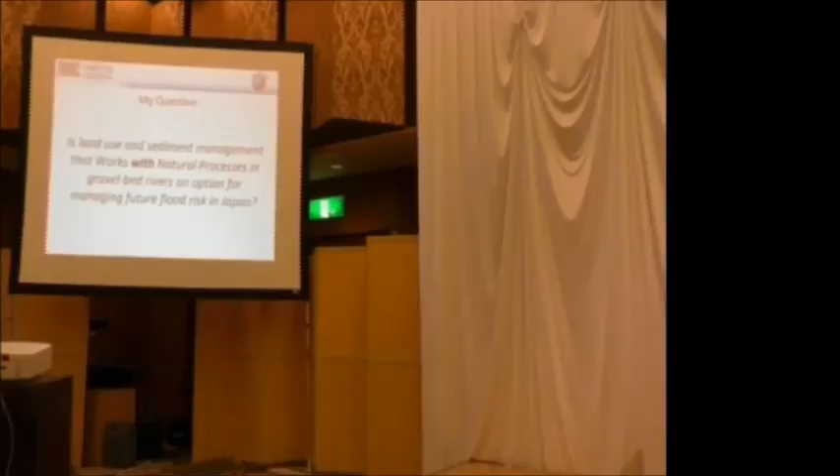I'm Yasuhiro Takemon. As a result of the combination of both methods, I think this question includes: are there any possibilities for management that include natural processes? I think this is very important, not only for disaster prevention and reduction, but also from environmental aspects. So please.

Hopefully we are going to have a method where a win-win situation can be made. For example, I introduced the case of the Tama River. In that case, lowering the river bed leads to an effect in terms of both aspects. If you lower the river bed, the flood flow capacity increases, but at the same time it leads to reviving the alternation between bare gravel surface and vegetation.

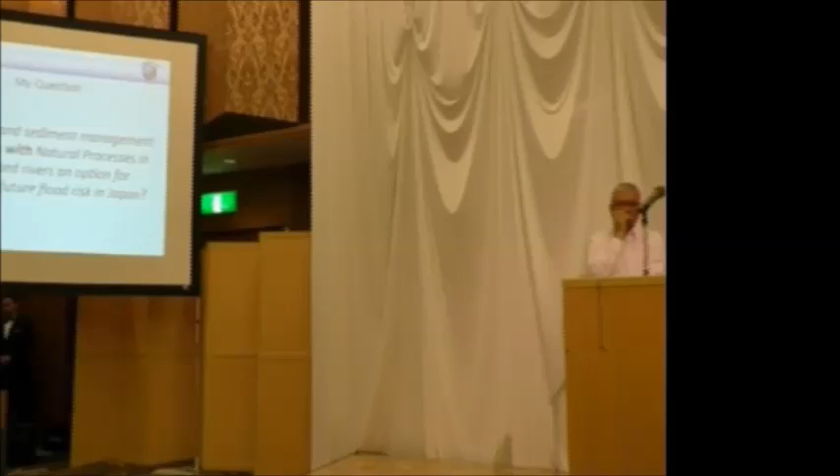The concept, I think, is very important. At the research level, a lot of discussion and examination has been made very actively. At the policy implementation stage, in some areas a retarding basin was constructed to reduce peak flood discharge. But to proceed with the concept further...

It's pretty sure we are confronted with consensus-building issues. Residents living on the upstream side for sure complain about the policy. In the sense of rationality, it's a very rational policy if we look at the whole risk management, but if you look at each village or each people living in the upstream riparian area, it's a very cold policy. So I'd like to seek for a policy that is both rational and warm. How we can reach such a policy is still conceptual, so we have to materialize the concept. But anyway, both are important, and the point is very important. In some areas in Japan, people are making discussion on that matter very seriously.

Thank you very much. There's one thing I'd like to add. After the Great East Japan Earthquake severe disaster, we changed the flood disaster mitigation policy as follows: two levels are set, level 1 and level 2. Up to level 1, the hazard must be protected by structural methods. But beyond that, between level 1 and level 2, we can no longer protect people by structures alone, so between level 1 and level 2, non-structural methods are a must. A new law has been activated for this. So the level 1 and level 2 concept of protection is now becoming enforced in Japan. That's another very important key concept.